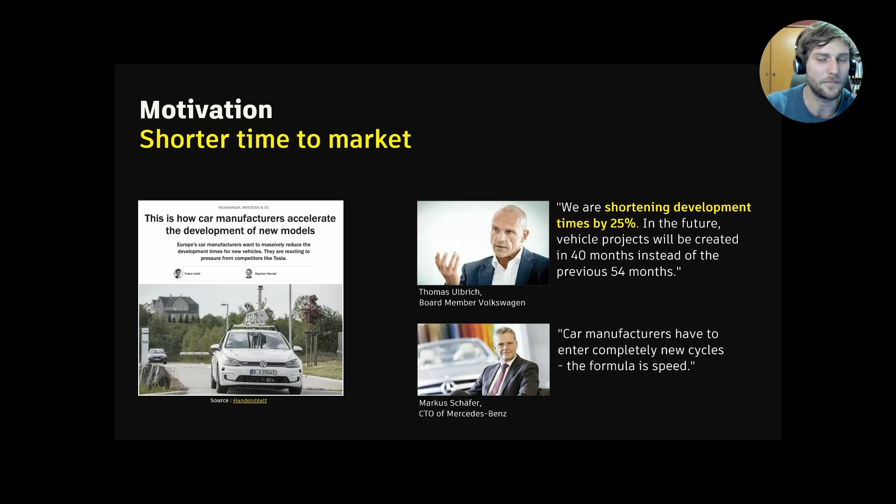The second aspect is that especially with the rise of electric vehicles, the aerodynamic performance becomes increasingly important because it directly affects the electric range of the vehicle. Right. So if we want to achieve those goals, we are really convinced that the best way to achieve those goals is to provide additional functionality, additional values in the tools that actually do the job. And if it comes to automotive design, this is most of the time Alias, where people really do the surfacing of a car.

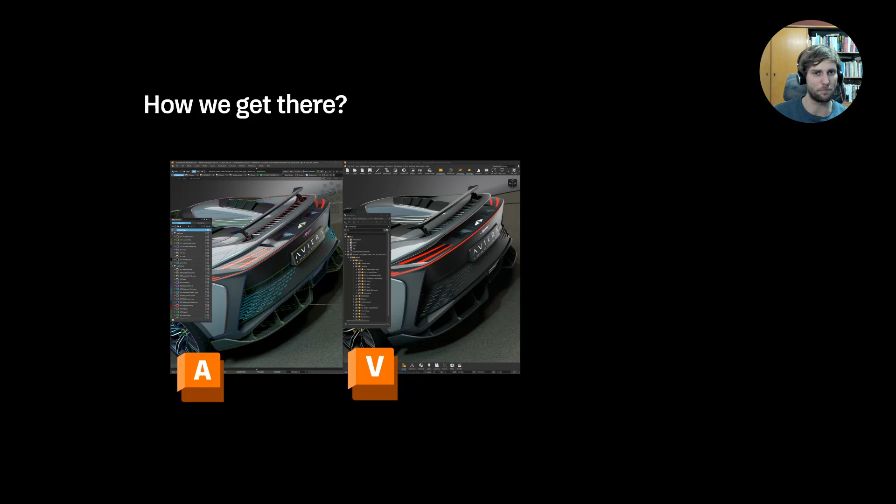If it comes to high-end visualization, people use VRED to really do the storytelling, evaluate different design stages. And what we did in the past is to connect both tools via live referencing. And now what additionally comes into play is that you can not only connect to visualization, you can also connect to engineering, bring engineering insights in the design process by the use of NavPack, which uses geometric deep learning to store aerodynamic knowledge and make it available in the design process. And this is also where we want to focus on today's webinar, a bit on the connect to engineering side.

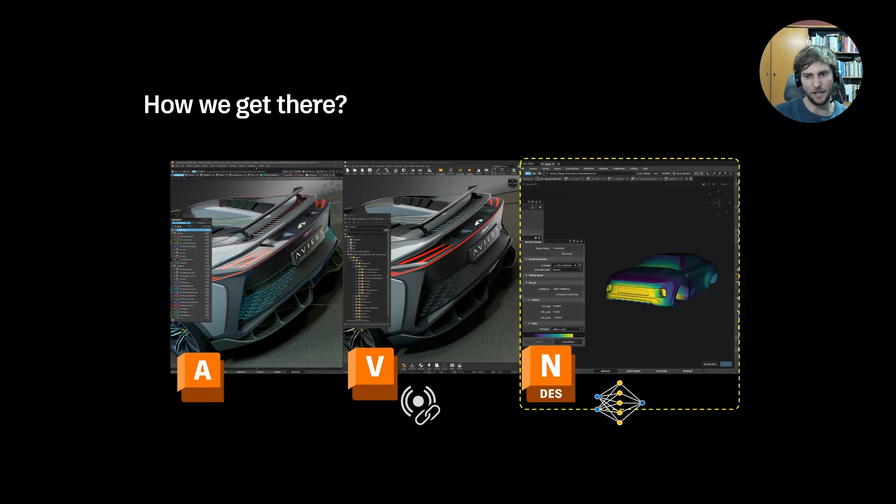So the underlying idea is really that you have one single source of truth, one design model in Alias, and you can quickly connect to different disciplines, either via live referencing or the usage of AI. And the underlying vision is that people can really do what we would call interactive design. So they can really meet in one room and make decisions in that room based on actual data.

They don't have to give away their current state of work, their current design model to other departments and then wait for results, wait for the next weekly meeting, and then meet again, make a decision or postpone the decision because results are simply not present. That's something that is very time consuming and also very costly. So imagine you have all those different disciplines together in a collaborative workflow and can make decisions basically in real time.

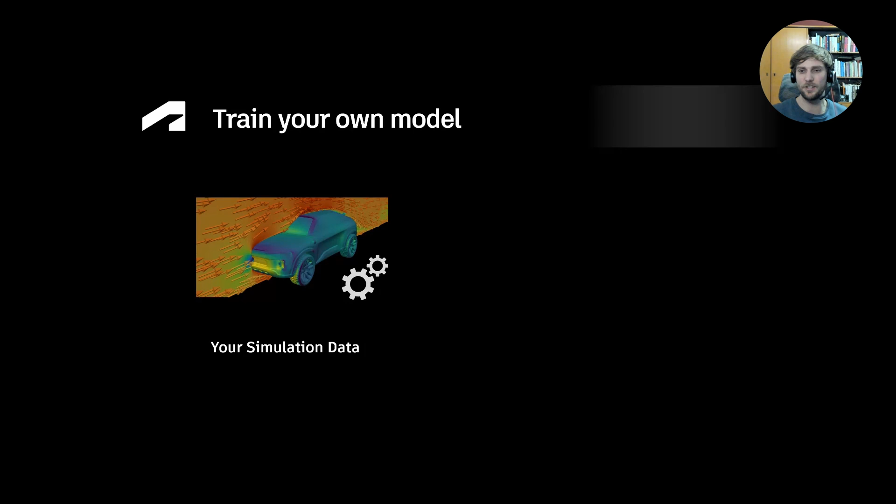And in terms of the Navasto integration in Alias, this works in a way that the NavPack software enables customers to train their own AI models based on their own simulation data. So basically, they use data that was produced in the past and extract the information that is inside those data sets. And instead of simply deleting those data sets because they require a large amount of disk space, which is really huge, they store this knowledge in an AI model.

Once the AI model is properly trained, it then can be used. So every time a designer or a surface modeler comes in with a new input, a new geometry, a new car, he can leverage the existing AI model to produce results in real time. And this is really a big step ahead, because you have to imagine

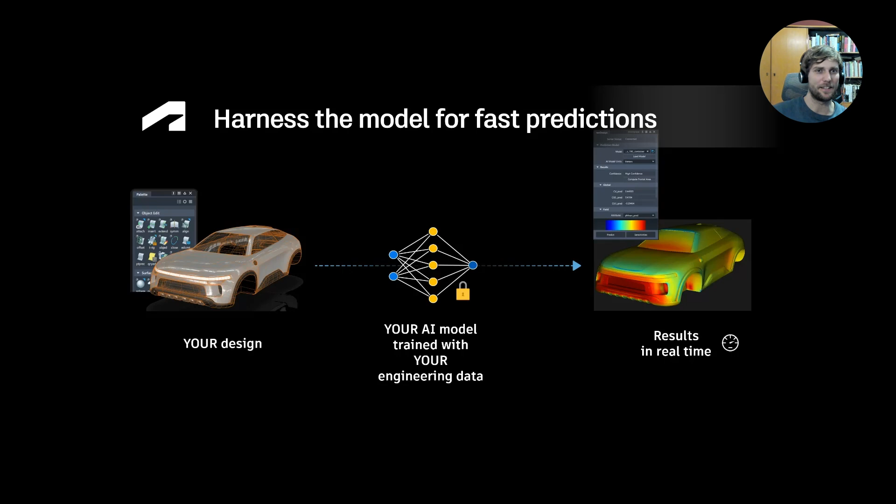in the present state, if people require high fidelity simulations to provide them with the results, this can take days or even weeks until the result is back on the designer's table. And I mean, you basically have no knowledge about the aerodynamic performance while you're designing for days or weeks, which is not good for a faster time to market. Right. So that's the underlying idea. If you think about the whole process, it basically consists of 3 steps. The first step is you need to read and process your existing simulation data.

Step number 1, which can take a bit of time. Second step is you then use that data to train and update your AI model, which can also take a bit of time. At the end, you save the AI model as a container file on your disk, which you then can use in Alias, which is quite fast. Right. So the first 2 steps, they are basically performed in NavPack, while the third step is performed in Alias.

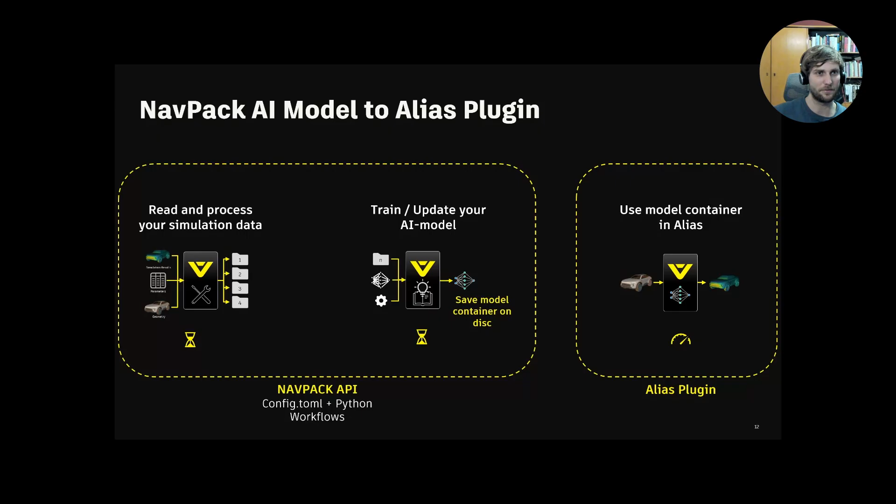Right. And without further ado, over to Barry. Barry, can you take? It's not allowing me to share right now. There it goes. Just taking it a second to get going.

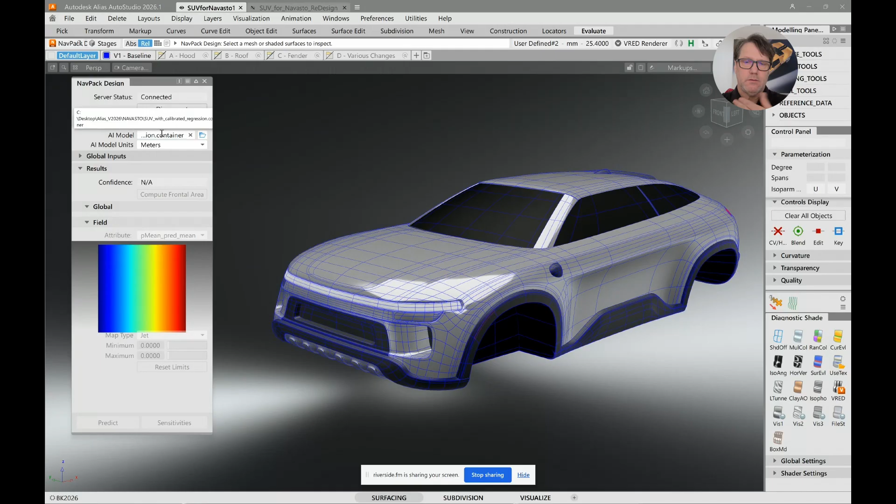Okay, so this is an example, I suppose, as Jakob said. I have NavPack Design open, plugin for Alias. It's found under the Evaluate tab in Alias. I've got a car model loaded. Jakob has taken the time to run the simulations and create a container file. So I'm connected to that container file here.

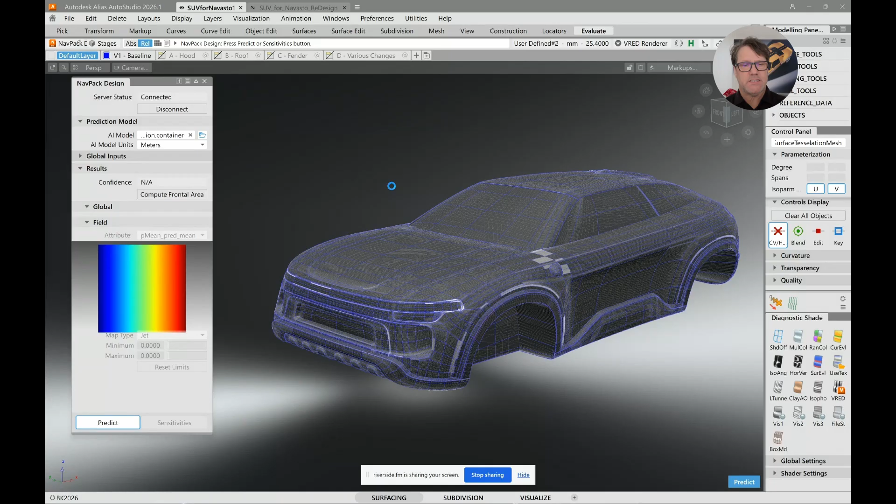It's fairly straightforward. You simply select your model and ask for a prediction. So the system is going out, looking at the container file and all of the simulations. It's going to return a result to me with some analysis, some aero analysis on this model. And here we can see that analysis.

So I think as a surface modeler, which is my background, just in surface design and automotive design versus the engineering side, I have to be a little careful with how I interpret these results. I need, let's say, a professional that knows exactly what these numbers mean. Some things that I have learned in my experience so far is the coefficient of drag is quite important. Most vehicles will have some kind of a target there.

And we can see here some predictions and all of the numbers for downforce on the front and rear axles, things like that. Something that many people like to understand about vehicle designs is their frontal area. So you can compute that frontal area. In this case, it gives us meters squared in the frontal area.

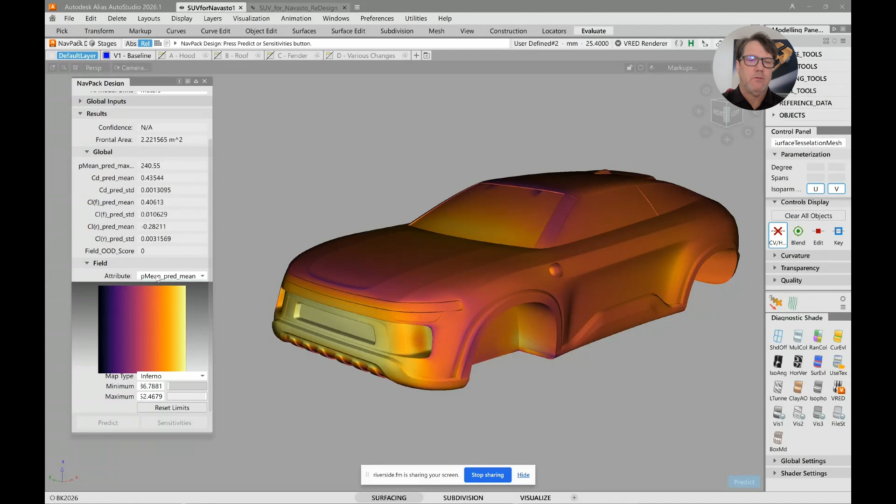Some other things that we have to explore here, just some different ways to display the analysis, just different maps. We're not changing what the analysis is. We're just looking at it in some different colors. We have some different attributes that we can look at here. Currently, we're looking at the mean. We can also look at what I believe is standard deviation. And then we can look at our calibrated uncertainty.

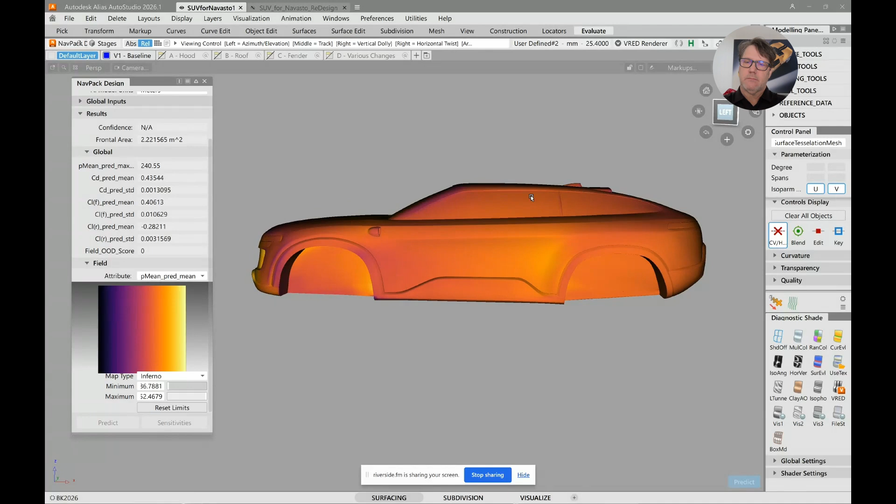So if we start to explore a couple of different models here, in this case, I've got maybe a different design. You know, you'll have this design, and then maybe engineering comes and says, well, there's not quite enough headroom in the back. So we could get a different design, maybe here, where we get a bit more roof space in the back, a little more packaging for the passengers. We could then take this brand new design model and simply pick it and ask for a prediction based on this. Again, it goes off, you know, a minute or two.

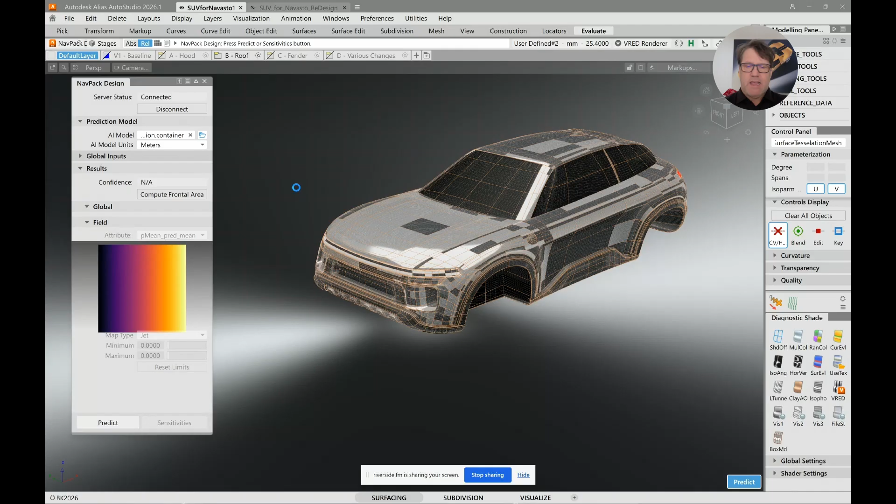This is just running for me. I'm just running on a pretty basic Dell laptop here, so no special GPUs, no special render farm thing hooked in the background. It's just a pretty basic Dell P1 laptop, and I again get the results here. So we can see here the coefficient of drag has gone up a touch. We can, again, simply compute that frontal area. I didn't write down the result before, but I think it was 2.22 meters squared, something like that.

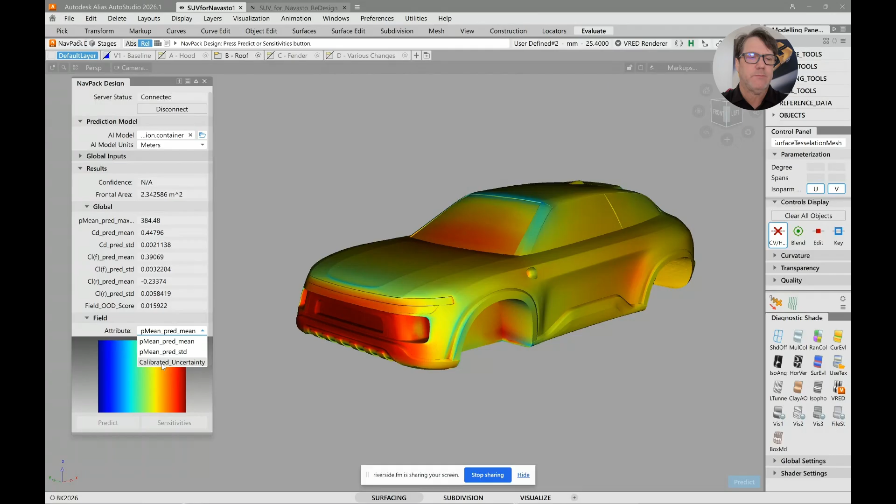And then again, we can come in here and we can look at our standard deviation and then maybe our calibrated uncertainty. Now the calibrated uncertainty is kind of an interesting thing to look at for users. This just is your indication that your model has not fallen outside of the aerodynamic area that's been concentrated on. And I'm using some generalized terms just as a surface modeler. I'm sure Jakob could explain these in more detail, but I couldn't put a very tiny passenger car into this aero and analyze it against this aero container.

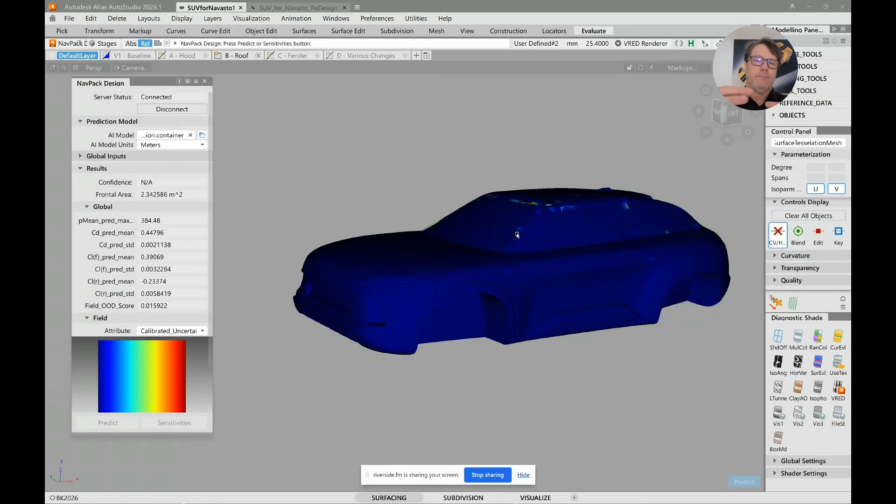This aero container is designed for this size and proportion of vehicle specifically. So there's been quite a few aerodynamic runs done on this, and I'm using those to simulate the predictions on this model. So here it shows still within pretty good area of uncertainty, and you can just continue to iterate on your design and get better and different results.

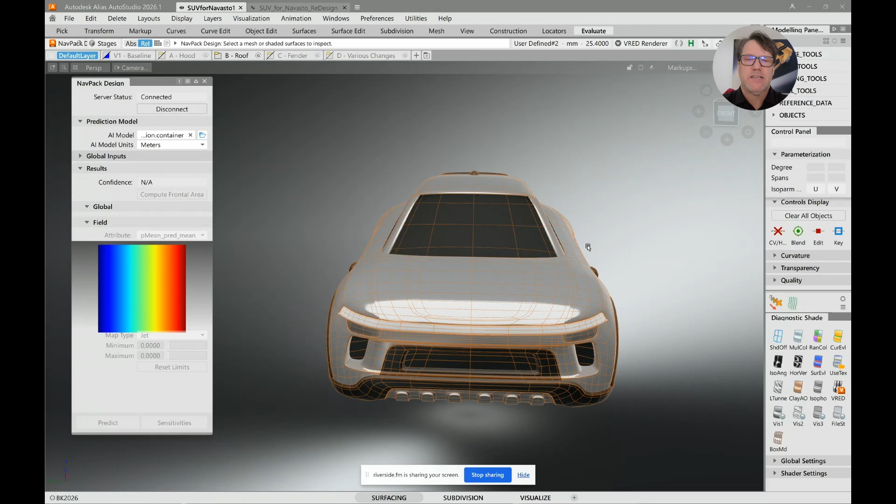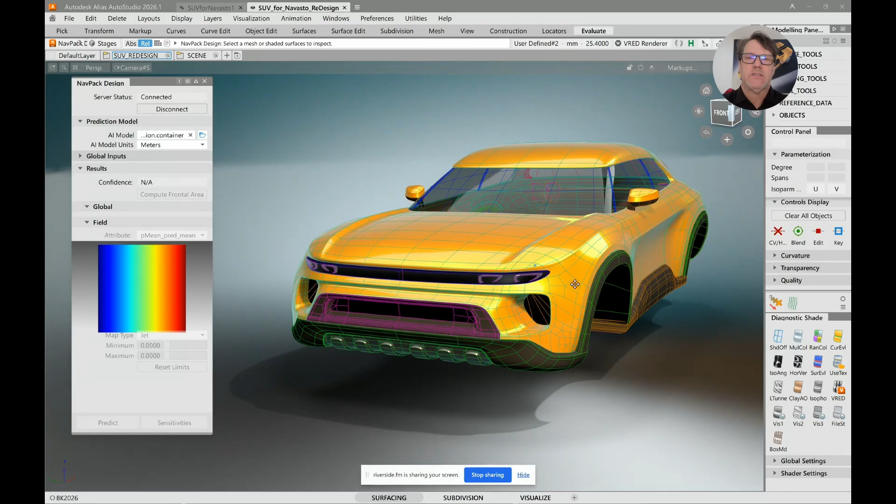So I'm going to switch now. This model tends to have what I would call a fairly narrow greenhouse with a pretty wide shoulder area here. So I'm just going to switch to maybe a little bit different design model here that's got a little bit wider volume across here, a little bit narrower shoulder, and we're going to do some predictions based on this. I know that wheels were not in the previous aero simulation, so I'm going to just take the wheels out. Again, I've got this just shaded here, and you just box select.

It grabs that shading or tessellation and sends it to the NavPack tool to do its prediction. So give it just a short time here to get these results returned. Again, running on a fairly small laptop here.

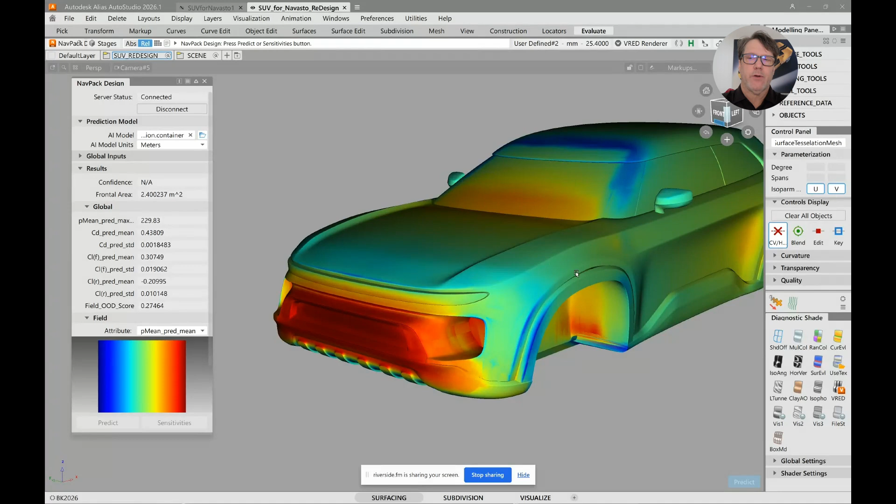So in this case, I can do the compute frontal area, and we'll see what we have here. My guess is 2.4. So we've definitely gone up in frontal area, right? And that's because we've widened this entire greenhouse.

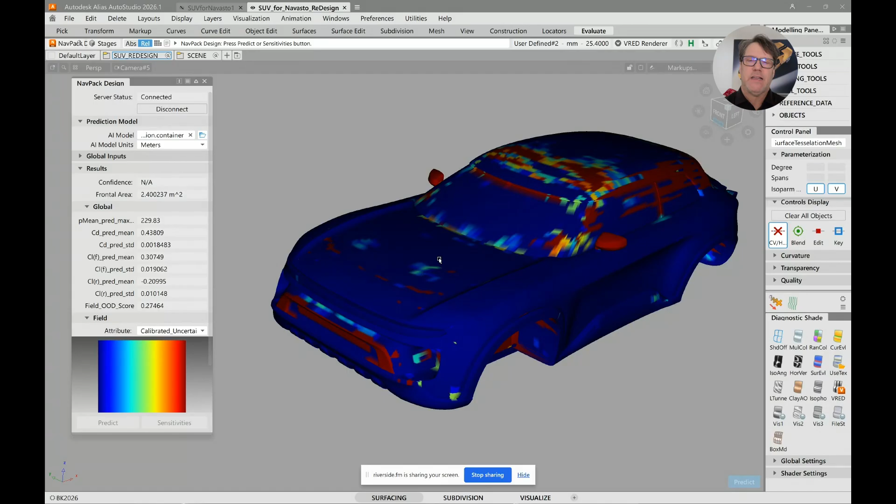And then we can go to our calibrated uncertainty, and you can see where the calibrated uncertainty starts to turn a little bit red. This should be a cause for concern as a surface designer. This is where I think you might get information that's useful to a surface designer, that you might want to be careful with these results. Talk to your aero support personnel, engineers, I guess we'd call them.

In this case, you can see this mirror is pretty much bright red. This means there was probably no mirror included in the original. And in this greenhouse, we've got quite a bit of red area.

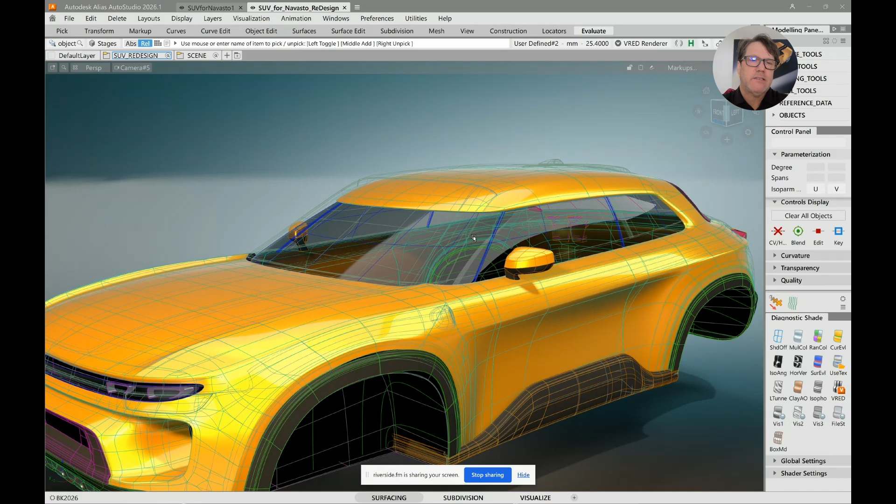And if I just show you maybe why that's happening, if we go back here in Alias, we can turn on the other model in the background. If you look here, in light green is where the previous model was. So we've grown probably 50 or 60 millimeters in width. And you can see that in the back, we've changed quite a bit.

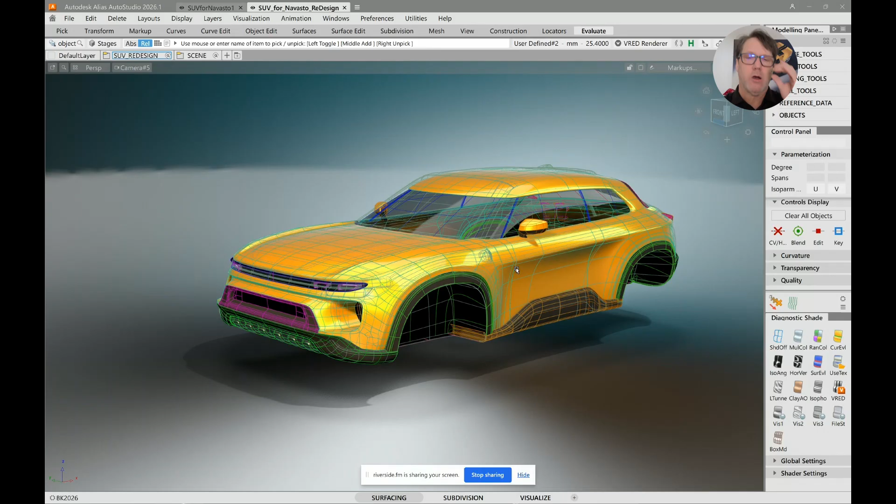So we may have gotten outside of the workable area for our aero results. And we may have to have the aerodynamic engineers update our container file so we can get a little bit better results from that. I think the last thing I might want to show is how you could take this model and drive it into using our live referencing.

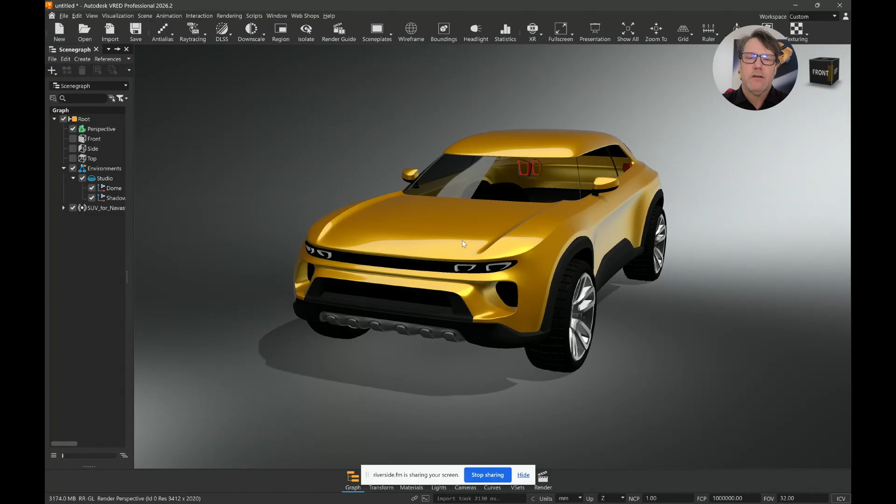So we have our live referencing here, and you can live reference this file into VRED, and then you can start to turn on some fancier bells and whistles using any number of the tools in VRED. So connecting the VRED tool, the Alias tool, and the aerodynamic tools together allows you to get quite a few apps linked together so that you can do design, visualization, and engineering, all in a pretty streamlined workflow.

So with that, I think I may pass it back to Jakob. Thanks, Barry. For a little. Let me take over again.

And I'm very happy that you brought that up, that this is not a magic stick. There will be no miracles here. It's really an engineering tool. It requires best practice. It needs some form of consistency between what you use to train that model and how you want to use that model.

So there are a few things that this technology really is. It's a possibility to left shift high fidelity simulation data. Basically, you run all those simulations on an HPC cluster or wherever when the project is not hot yet. And then you store the information that is in those simulation samples in the AI model. That's called left shifting in the industry, if you use that buzzword. And then you can use the AI model.

So you gain a lot of speed, but at the cost of generalization. As you saw, our AI model didn't know about car models with a classic side mirror. That was never seen by the model, so it did not know about this. This is why it turned up red in the calibrated uncertainty. The model only knew about those fancy camera systems that you see on electric cars these days.

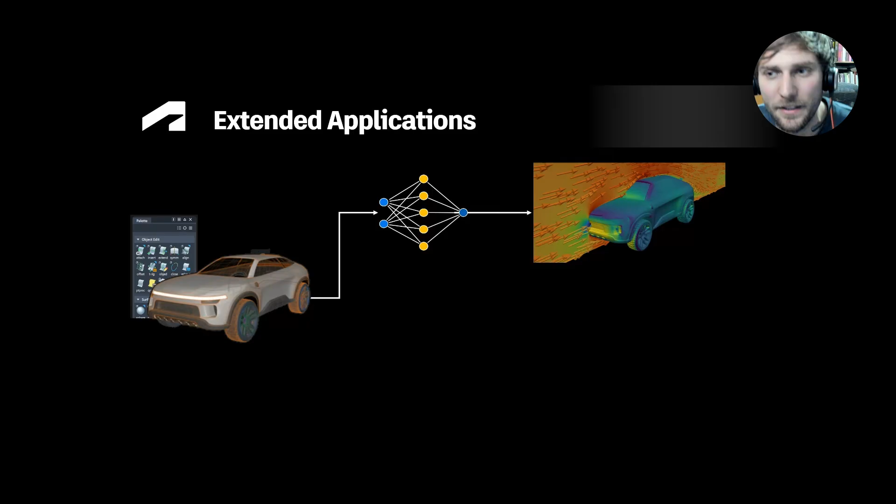External aerodynamics, as you saw, I think this is a massive use case, since you really can boil down the turnaround time for an aerodynamic evaluation from 2 weeks to, let's say, 10 seconds on a standard laptop in a meeting room. You can also apply this to passenger safety or crash analysis, durability or structural analysis, or even the cost of sheet metal stamping.

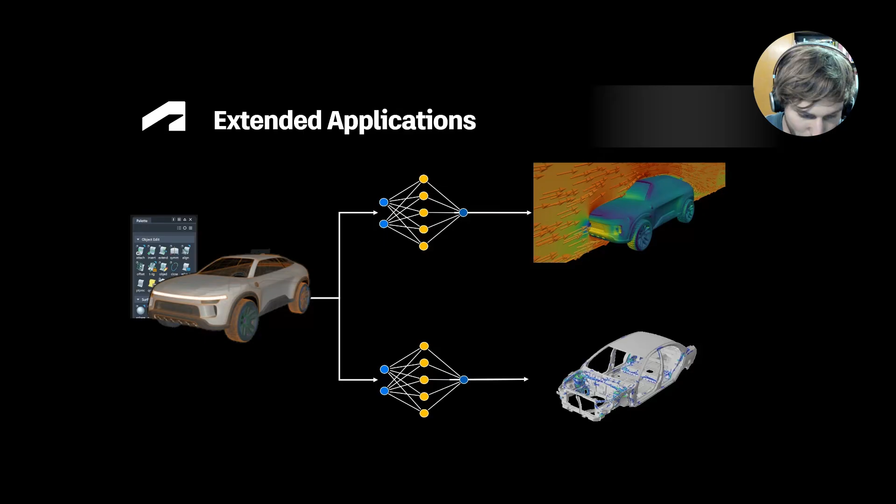These are applications that we see in the field. And as I said, it's the same technology. It's about inputs and outputs. So you store the corresponding simulation results in the AI model and then make it available in a tool where you also produce the inputs.

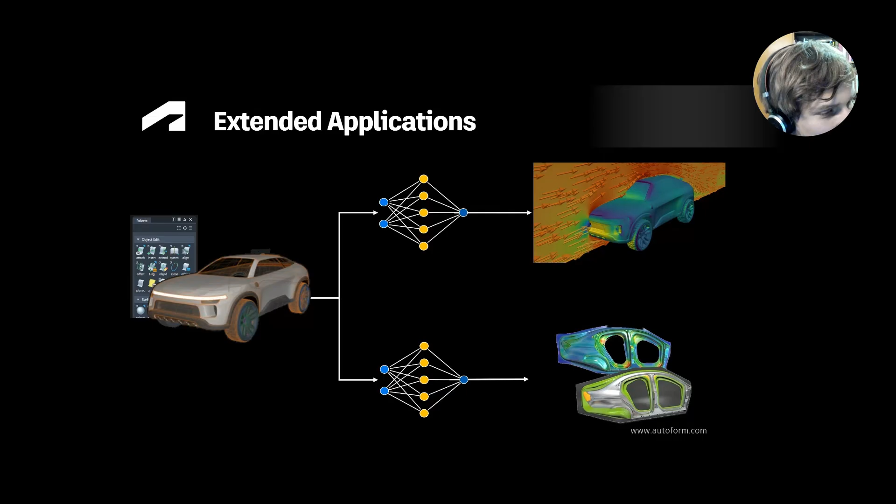So the one question that we usually get is, how accurate can this get? And also, how many data samples do I need to feed into the model until it gets accurate?

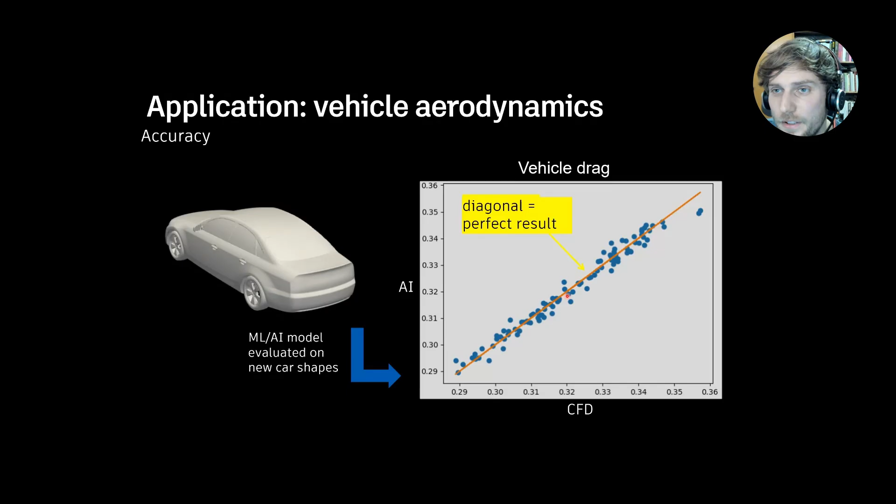It's not limited to scalar values. As you saw, you can predict values on the surface of the car, which is usually a static pressure or a wall shear stress.

And I think this is what makes the technology valuable, since the AI prediction again only takes a few seconds.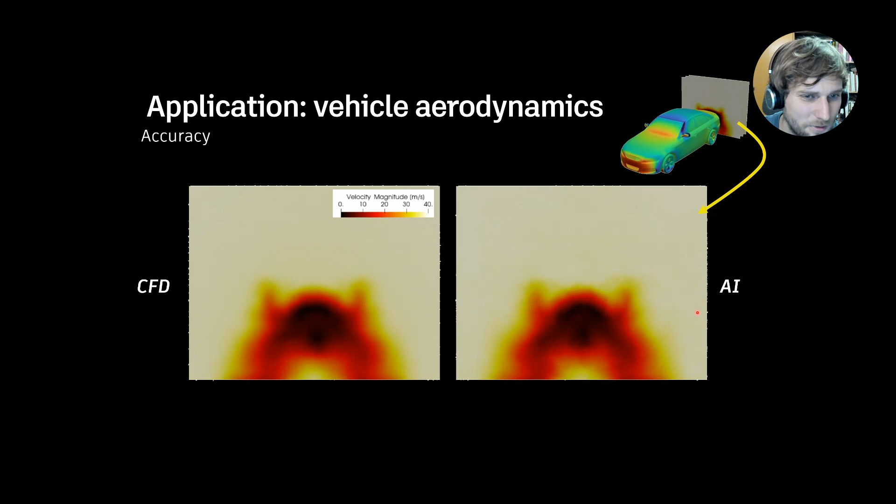If you're more on the engineering side and want to look closer into vortical structures, you can also use the so-called in-plane velocities and visualize them. And I think you make the same observation: the general trend is observed quite well, while smaller details might differ a bit.

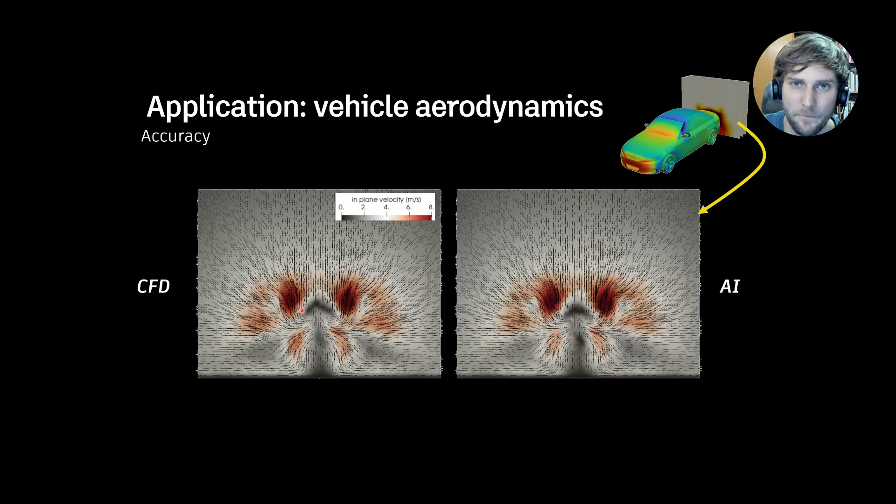So let's imagine one thing: you got the system running. You used all your simulations, whether a fresh set or legacy data present in your company or project. You use that, you trained your AI model based on that data, and you made it available in Alias.

You could play around with different parts, different shapes, and evaluate the performance. However, you're not quite satisfied, say the aerodynamic resistance or drag is still too high, the electric range of my vehicle is not competitive. I need some guidance on how to really gain some performance somewhere. How can I do this?

This is where we can couple this predictive AI model you saw in the previous slides, also in Alias, with a generative AI model, if you want to do it like this. So basically the generative AI model direction creates unlimited new variations of that car, completely automatically, completely new unseen geometries.

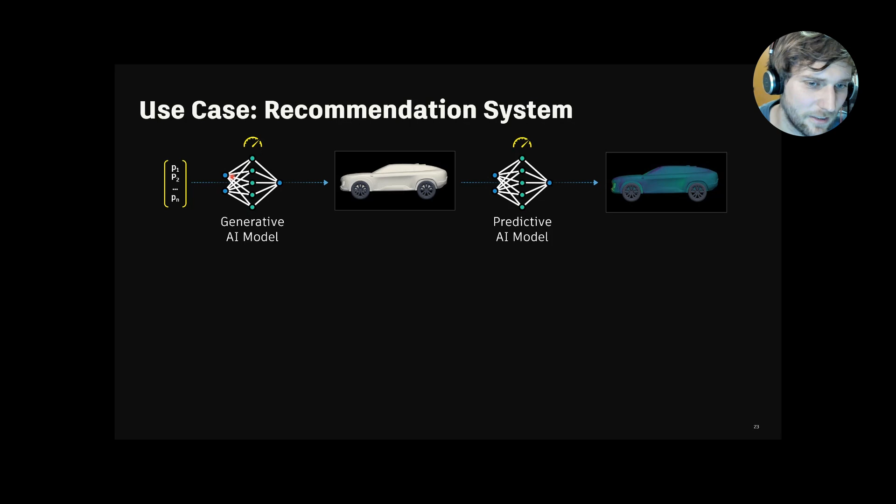You can either just follow the AI guidance and trust the prediction, or you can say no, I would never trust an AI prediction, I want to run a test simulation for the most promising geometry. I run the simulation, I evaluate, and if it's proven, then I can go into this direction. Maybe I just want to use the 5 promising variants and not 100 of them.

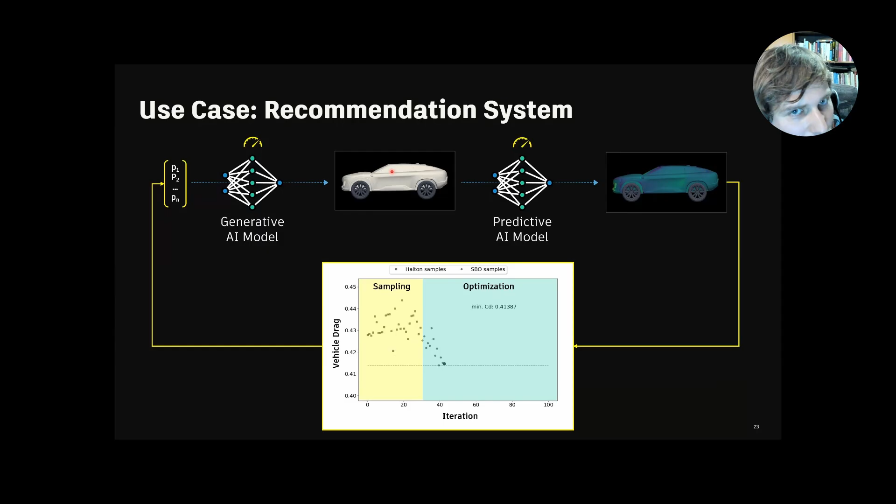I think that's the power. And to wrap this up, this deep learning technology should really be used as a recommendation system or a pre-selection system, which helps you get a bit more confidence to follow those ideas. Because every change on that vehicle, if you have a high fidelity model, really requires some effort, some hours of modeling to make it crisp and shiny. So this hopefully helps you get some confidence in that.

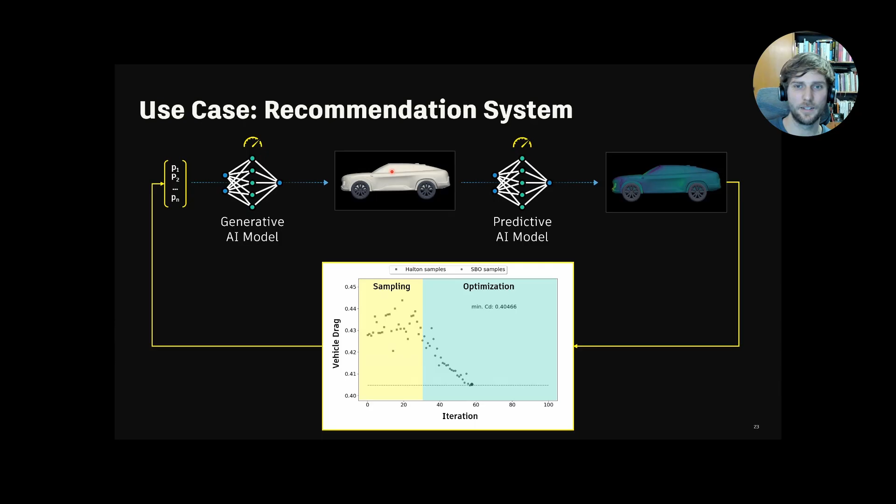Right, that was the last slide. Probably there are some questions from people on the internet, from the audience. So I'm happy to answer them.

Super nice, thanks Barry and Jakob. Let's head over to the questions, we have a couple of them actually. One question: could you please specify again what this surface uncertainty is?

Right, I can take this question. And yeah, again, I'm very happy that Barry brought this up because I think it's very important. If you think about the fact that an AI model always gives you a prediction, you feed in a new input, you get a prediction, and then what now? The most important question, and I would say that's kind of the holy grail of machine learning, is to get an idea whether you can trust a prediction or not.

And there are many ways out there. What we said is we really want to provide a value where a designer has information what detail, what part of the car makes a prediction not trustworthy. Because just information like 'you should not trust this prediction' is a bit of a weak information. So we said, okay Barry, keep in mind your AI model has never seen mirrors, we didn't do that for the last 2 years, so keep in mind, if you remove the mirrors, you're back in range.